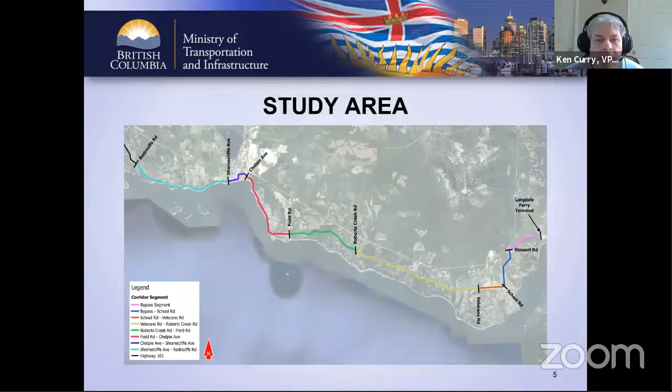You'll see the different colors here. We broke it into some different areas, some for the more urban areas, some for the more rural areas, and some based on the geometry of the road, such as the initial segment from the ferry terminal to Stewart Road, for example, being a 4-lane highway in that area, and the other sections being 2 lanes. So each section was analyzed a little bit differently.

When we looked at some of the analysis we were looking to do on the corridor from a highway operations standpoint, we were definitely looking at the capacity analysis of the corridor.

There's definitely no concern that the existing corridor was exceeding capacity at any time, both existing and in the future. So we looked at the rural segment primarily, that's what's being driven out there from a highway operations standpoint. The segment between Veterans Road and Field Road, we broke into 2 pieces. Then we looked at intersection operations, since those govern the capacity of the highway at those nodes. We looked at 11 intersections along the corridor to assess the capacity analysis at those locations.

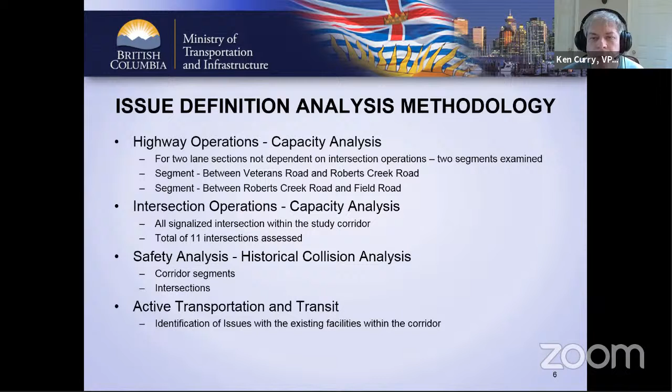We also did a safety analysis of the entire corridor, looking at the corridor segments and each individual intersection where we have data collected over the last 5 to 7 years. And then we did a high-level review of active transportation and transit in the corridor, and looked at how we could address those as part of other improvements for the corridor.

From a highway operations standpoint, in that rural section between Veterans Road and Field Road, we looked at the segments both in the existing and the future. This is the existing situation out there today, as we analyzed in 2018, looking at summer and fall. Here we're looking at a level of service, which is more about passing opportunities and time spent following - a kind of industry standard measure for analyzing 2-lane highways.

The information presented on screen shows a level of service, ranked A to F. E and F are typically considered unsatisfactory, while A to D is deemed satisfactory. A tells us there's a really good level of service, F tells us there's a really poor level of service, meaning time spent following is really high at level of service F.

So we see here in this table that today, looking at both summer and fall, the highway is right at that cusp - it's at level of service D. So it's just about at the point where we look at trying to make some improvements.

But when we look at the future, out to 2035 - a period we developed based on some of the OCPs of both Gibsons and Sechelt, and some work done for the regional district - we came up with 2035 as a good point to forecast our traffic volumes. Looking at 2035 in both summer and fall, we can see that during summer volumes we're definitely getting into some issues, with level of services D, E's, and F's. So the facility by 2035, or before, would start to have an undesirable level of service in terms of percent time following.

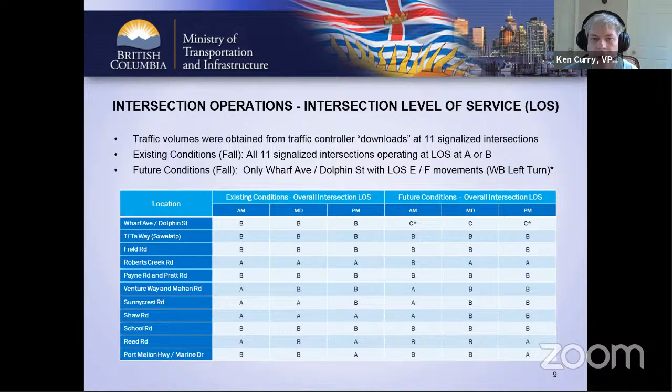Through all this analysis, looking at the fall operating conditions, there was only one intersection showing poor movements: the Wharf Avenue and Dolphin Street intersection, where the westbound left turn had definitely poor, almost failing, levels of service with lots of delay for that movement. So that one definitely needed to be addressed as part of our options and mitigation measures.

From traffic safety collision analysis, we looked at data from 2008 to 2017, about 10 years of data. There was a total of just over 600, almost 700 records in that area.

From that, we looked at the severity—how many fatal incidents there were, personal injury, and property damage only. We saw about half of the incidents were personal injury or fatalities.

That tells us that in a corridor like this, we're probably seeing incidents where vehicles stop to turn left off the highway, stopping in the through lane because there are no turn lanes, and getting rear-ended by other cars not expecting a stopped vehicle. That guided some of our mitigation measure development.

This map provides a summary of all the performance and safety deficiencies along the corridor. We had quite a few issues, and I didn't touch much on the Davis Bay segment, but there are definitely a lot of safety issues there at some of the intersections, so that segment got some special treatment in our development of mitigation measures.

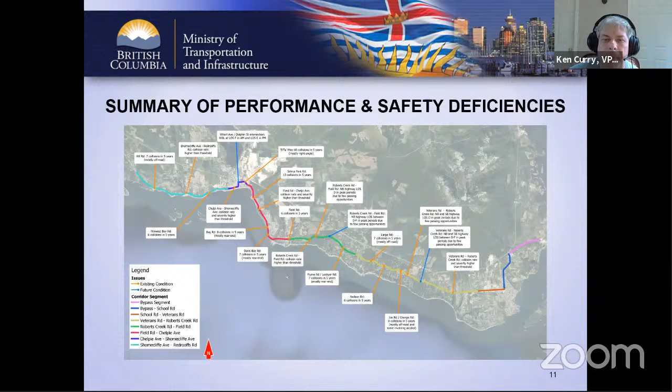Now for the improvement options, at a high level we looked at highway performance—the two-lane rural section—intersection performance, and safety. We identified where the issues were and the time frame, whether existing or future deficiencies, and what kind of potential improvement options could address them.

We looked at new passing lanes for the rural highway segment to address the level of service issue—not a capacity issue, as I mentioned before, but more about level of service and percent time following.

For intersection performance, we looked at increasing capacity at some intersections, primarily the Wharf Avenue and Dolphin Street intersection. Then for safety improvements—where we focused a lot of our efforts—we looked at left turns off the highway, acceleration and deceleration lanes onto and off the highway, and modified geometry at some intersections to improve the angle that the approaching road connects to the highway.

We also looked at some places for turn restrictions, and in a couple of locations, some new traffic signals.

With respect to the highway's rural section, passing lanes between Gibsons and Sechelt, we developed three passing lane improvements, located between the Field Road and Veterans Road area.

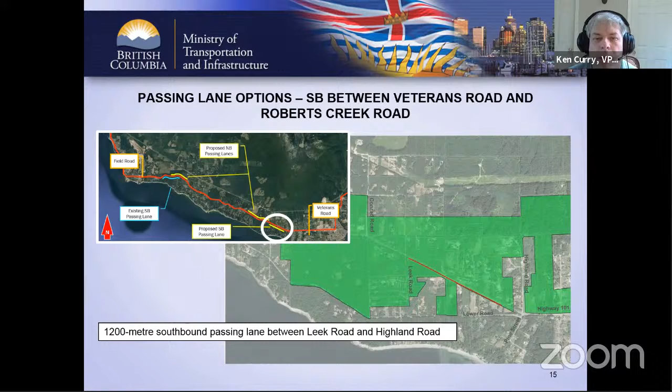So we just think of a couple of things like the passing lanes. Here we look at the southbound direction between Veterans Road and Roberts Creek Road. We looked at about a 1,200 meter segment between Leek Road and Highland Road to address the poor level of service in the southbound direction on Roberts Creek Road. And similarly in the northbound direction, we looked at about a 1,600 meter long northbound passing lane between Leek Road and Maskell Road.

These distances and locations were chosen trying to optimize the locations in terms of reducing or minimizing the number of conflicts with some municipal roads or even with driveways. So we're trying to reduce those numbers as much as we can, and that's where we tried to optimize and maximize the length of the passing lanes.

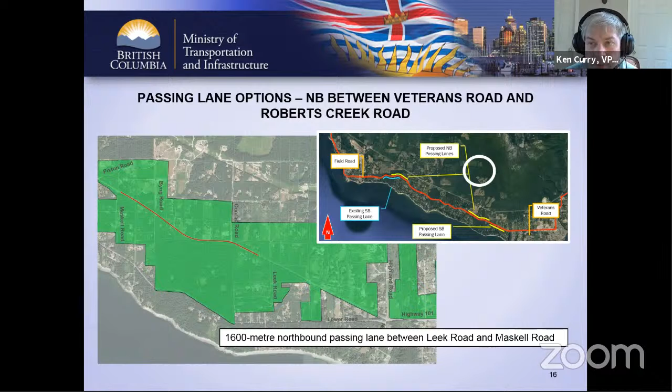So this one was a northbound passing lane opportunity between Veterans Road and Roberts Creek Road. And the last one was an 1,800 meter northbound passing lane between Pell Road and Jack Road. So these are the three passing lane options that we considered in our improvements.

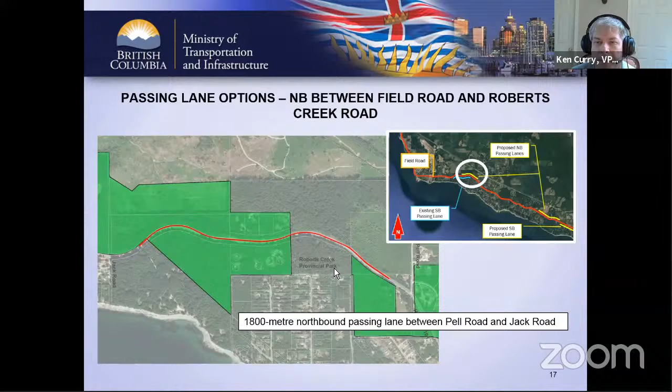When we think of intersection improvements, we looked at about 8 different intersections. At Joe Road and Orange Road, we looked at adding a northbound left turn lane and a southbound left turn lane, so kind of opposing left turn lanes. This is a location that today has no left turn bays, and this could be a reason for the rear end collisions popping up. So by separating out the through movements from the left turn lanes, we hope to improve safety and the overall intersection geometry.

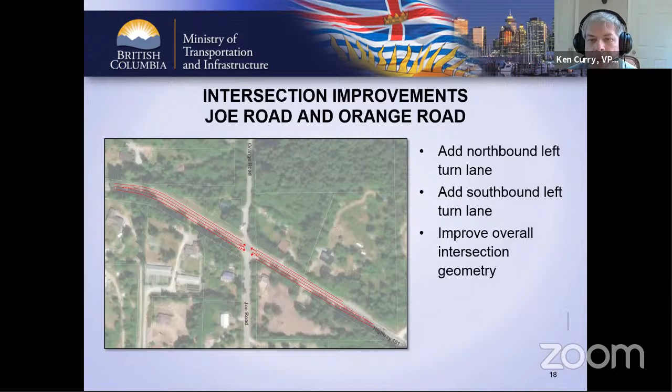At the Flume Road area, we looked at a couple of improvements at Flume Road and Marlene Road. Here we would again be adding left turn bays at these locations to separate the left turn movements from the through movements. And we'd probably have a painted median between the two intersections given their close proximity.

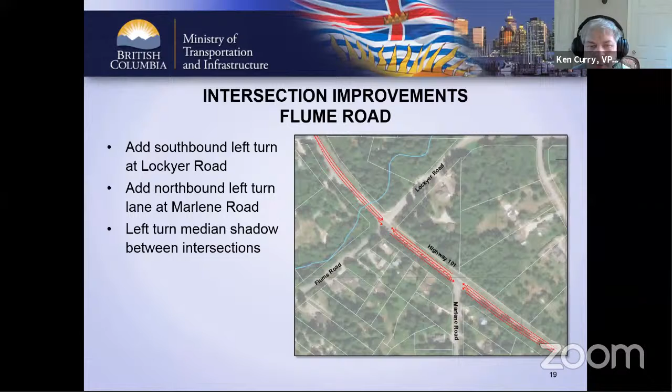At Lower Road and Highland Road, again we'd be looking at adding left turn lanes. We'd also be looking at having a deceleration lane in the southbound direction, which might help given the tight geometry on Lower Road. So those would be the improvements we put forward at that location.

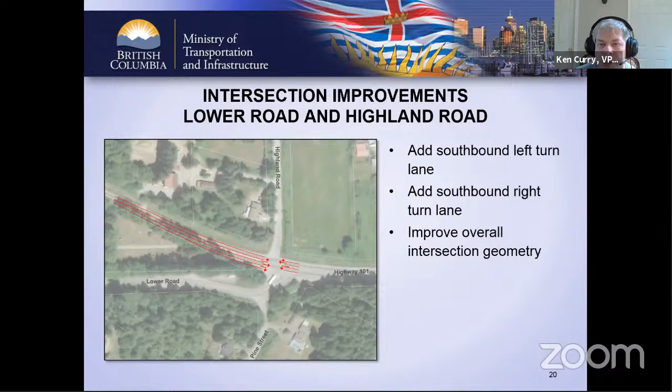At Ti'ta Way, this was a safety issue that was raised, so we recommended to the ministry to look at maybe a southbound left turn protected-only phase. When we looked at the collision types at this intersection, we saw a few collisions related to people making unsafe left turn movements. So we felt that if we put that in a protected-only phase, it could improve that operation.

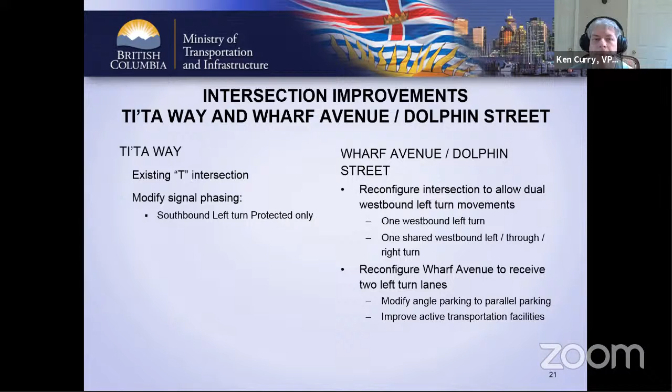At Wharf Avenue, we had capacity issues that we raised, so we felt we would reconfigure this intersection to allow dual left turn movements in the westbound direction. That would mean some minor modifications of Wharf Avenue to receive those two left turn lanes, potentially modifying the angle parking to convert it to parallel parking, which would give an opportunity to improve the active transportation facilities adjacent to the parallel parking.

At Shorncliffe, we recommended tightening up the intersection, improving the geometry. We would look at modifying the islands and the channelization, which would reduce the crosswalk distances at the location, reducing the exposure for pedestrians crossing the road. This is a location that could potentially have a traffic signal, or at least a pedestrian crossing signal, to improve pedestrian safety crossing the highway.

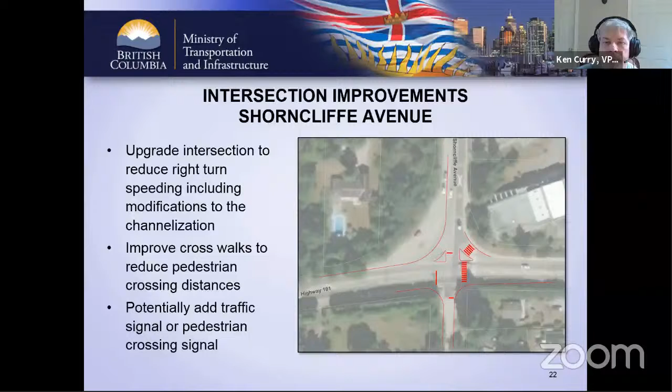Then a couple other smaller improvements, just some realignments. This is at Hill Road. The existing intersection connects with Highway 101 at a very skewed angle with poor sight distances. So we put forward a recommendation to look at an alternate access for the residents on Dale Road, where we have a connection go out on the backside and connect up to the highway with a more perpendicular intersection with a left turn bay at that location.

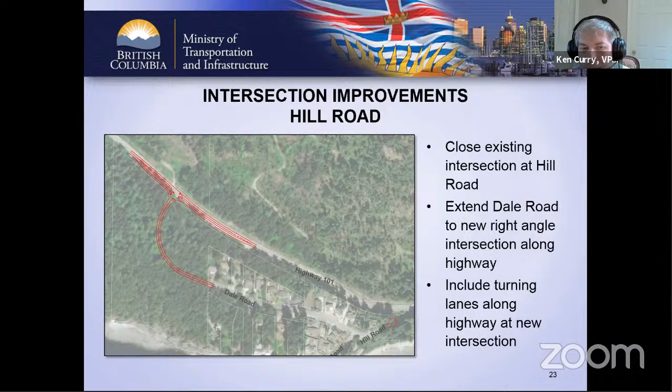Similarly at Red Roofs Road, the skew angle makes it difficult to have clear lines of sight when turning off of Redrooffs onto the highway. So we would suggest a slight realignment to make the intersection a little more perpendicular where it intersects with the highway.

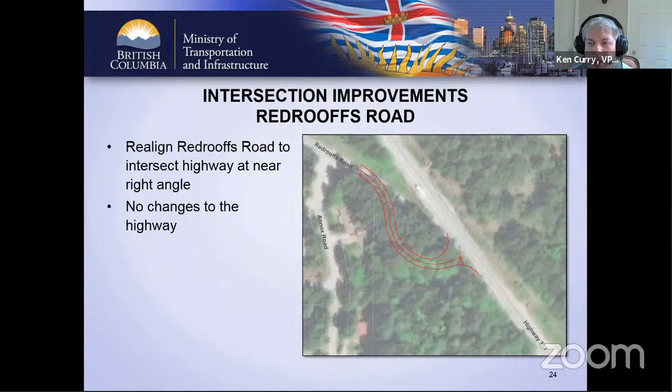As I mentioned at Davis Bay, there were a number of safety improvements we felt were necessary at this location, with a lot of collisions in this area. So we felt it was necessary to improve the overall cross-section through this area from the very south up to Monkey Tree Lane.

At Davis Bay Road, we're suggesting a possible new traffic signal be put into that location. Left turn lanes are proposed at intersections such as Mission Road, Heather Road, and Selma Park Road. We'd also look at restricting turning movements at Whitaker Road, Wesley Road, and Habby's Road to right in, right out only, and we'd recommend closing the north intersection at Monkey Tree Lane.

So we're trying to reduce conflicts as much as we can along this segment, but where warranted, we'd also improve access off the highway with left turn bays, so we're not affecting the through movement while improving safety at those intersections.

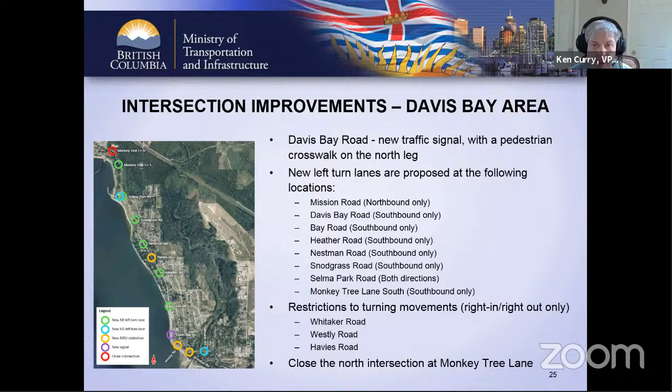The cross-section we were proposing for the Davis Bay area would have 2 through lanes, a center left turn lane for both northbound and southbound movements where applicable, a 2-meter shoulder to ministry standard for cycling, and a sidewalk on the east side.

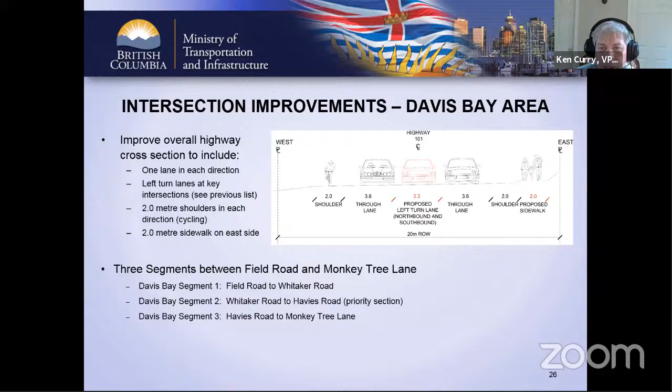So this gives us an overall map of where all the intersection improvements are proposed, along with the passing lanes. This also shows the long-term bypass options that we explored.

We looked at 3 bypass options. Option 1 was a shorter bypass using Reed Road. Option 2, the red one, was a bypass cutting through the backs of the properties between Cemetery Road and Reed Road, so we wouldn't have any access issues. Option 3 was a continuation of Highway 101 adjacent to the hydro right-of-way, connecting back to Payne Road.

We had different options for connecting back up to Gibsons Way or Highway 101 from Payne Road, potentially going to the other side of some developments to stay away from the accesses onto Payne Road.

Our recommendation was to consider further bypass option 3, mainly because Reed Road has a lot of access onto it, so that bypass would almost be conflicted from day one if development continued in that area, and we'd end up with a lot of accesses onto the bypass that we're trying to avoid on the existing corridor.

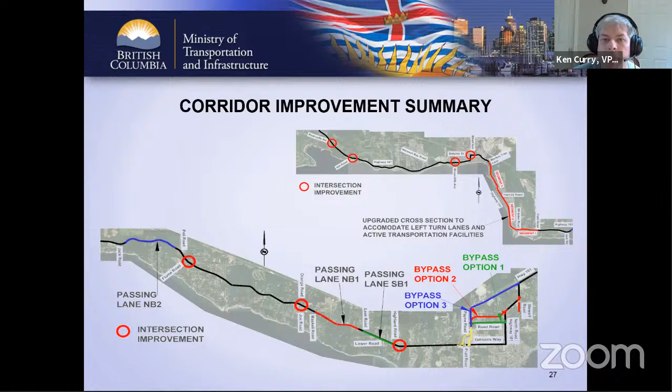So I'll quickly go through the evaluation results. For the passing lanes, we found that all three passing lanes we examined - one in the southbound direction, two in the northbound direction - reached an acceptable level of service well into 2035, so we did see definitely some big benefits with those.

We're recommending that the ministry consider those in the future. With the intersections we looked at, in terms of collision reduction we saw moderate to minor improvements. On average, at places like Joe Road and Orange Road, almost a collision per year on average could potentially be reduced with those intersection improvements.

Up to just a little over one collision per year at Flume Road, for example, with some minor improvements at Lower Road, Highland Road, and similarly at the Ti'Ta Way intersection. With the double left turns we're proposing in the future at Wharf Avenue and Dolphin Street, we'd see the level of service improved to acceptable levels by 2035.

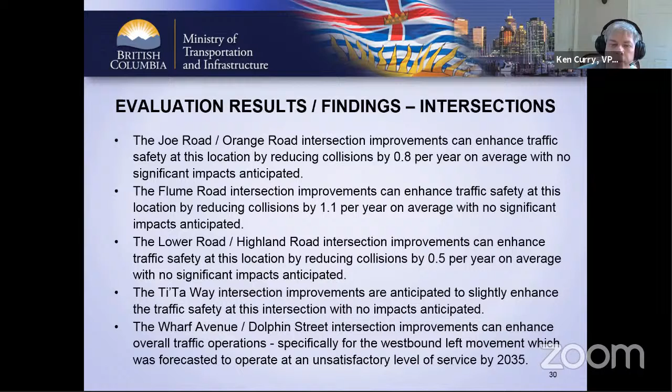At Shorncliffe, the collision data shows we'd see minor improvements in average collisions reduced per year, similar at Hill Road and Redrooffs Road - those are fairly minor volume intersections. But when we look at the whole Davis Bay and Selma Park area together, all those improvements combined could reduce upwards of almost 7 collisions per year in that area.

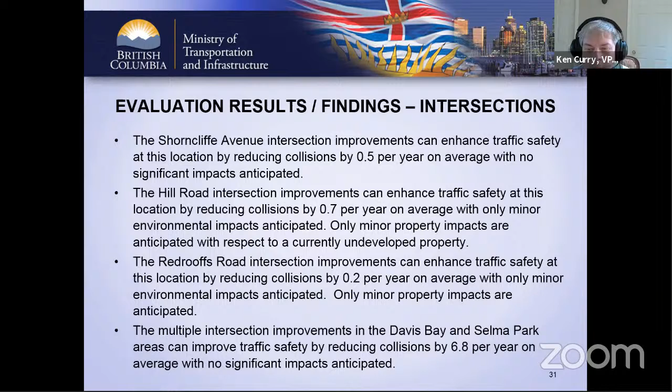Active transportation: when we went through and did our reviews along the corridor and met with Sechelt, Gibsons, the regional district, and the First Nations themselves, we found that there were a lot of gaps in the active transportation facilities out there today, both in sidewalks and cycle lanes, especially in the urban areas. Narrow shoulders along the highway in the rural areas, definitely not to current standards, and there's some informal facilities or limited space at several of the transit stops along the corridor, with very tight spacing for some of those stops.

So when we think about some of the things that came out of our study, targeted improvements - we're showing improvements that focus on Shorncliffe Avenue to improve pedestrian and active transportation crossing the highway, including improved geometry, traffic islands, channelization, and potential pedestrian signals. In the Davis Bay area, we looked at significant improvements that would come with an improved cross-section, including shoulder cycle lanes on both sides and a sidewalk on the east side.

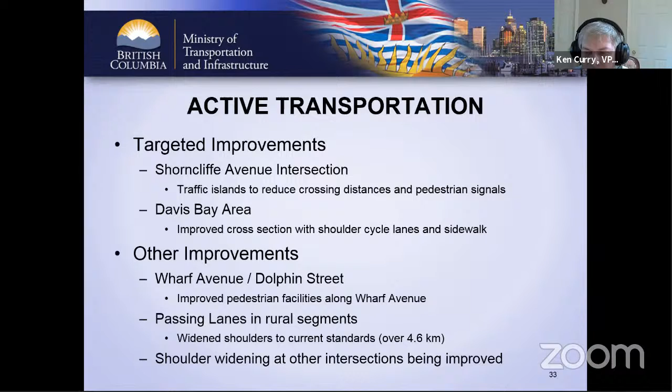When we look at other locations, such as Wharf Avenue and Dolphin Street, those improvements would facilitate improving the pedestrian facilities, along Wharf Avenue, as part of that intersection improvement. The passing lanes in rural segments would present an opportunity to widen the shoulders to current standards - there's over 4.6 kilometers of passing lanes proposed here, giving a lot of improvements to the shoulders in those locations. And everywhere else there's an intersection improvement, the roadway would be reconstructed to current standards, with shoulder widening as part of those projects when approved for implementation.

So finally, just to put a little summary on some timelines. What we've recommended back to the ministry is that the following intersection safety improvements be moved forward: Joe Road, Orange Road, kind of top of the list, and Shorncliffe Avenue, followed by Lower Road and Highland Road, and then Ti'Ta Way.

One of the things to address some of the traffic issues that we saw, and what we heard back from the town of Gibsons as well, is that quite a few of the intersections experience within the peak hour some isolated delays, really to do with ferry traffic surges. So they see maybe within 20 minutes to half an hour, within the hour, significant delays at some of the intersections. But when we look at the intersection over the overall hour, they're operating not too bad.

So what we've suggested the ministry consider is what we call adaptive signal control. That's where the signals have detectors before and afterwards, and they can see the demand increasing, and they automatically adjust the signal timing so that the green split towards the highway would increase temporarily to adjust for the demand, then go back to the normal signal timing plan based on normal conditions outside those ferry traffic surges.

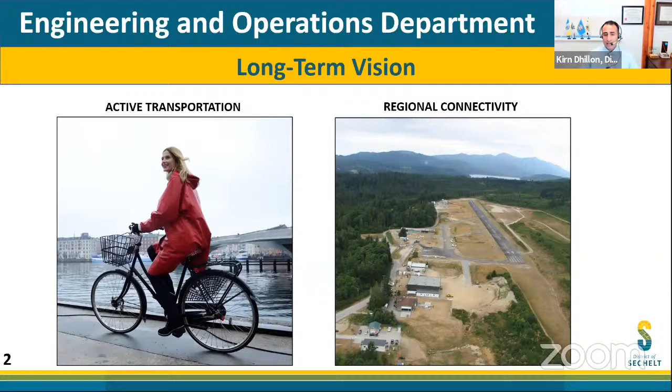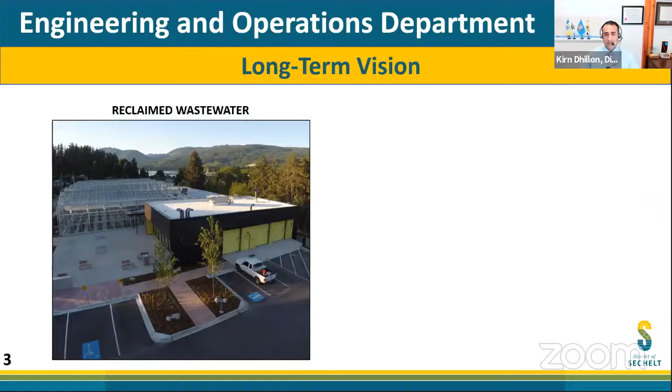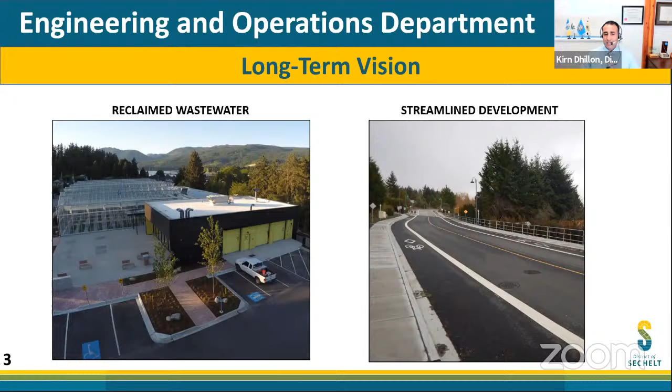I wanted to talk about—let's fast forward in a time machine to the year 2025—and hopefully the things we would like to see in Sechelt by then. Rather than having a low active transportation score, Sechelt is one of the best active transportation communities in the province. We've leveraged grant funding and created a very comprehensive network of active transportation that our citizens enjoy. We have better regional connectivity because we've expanded the runway at the airport, and now we can entertain some flights that we couldn't before. Our reclaimed wastewater facility is functioning at peak optimal capacity, and there are opportunities for residents to use the reclaimed wastewater we produce. Development, in terms of engineering approval, is more streamlined now, with more clear processes in place, and Sechelt is attracting very good developers building sustainable developments in our community. We're adopting more green infrastructure principles and seeing how we can incorporate those into our infrastructure projects.

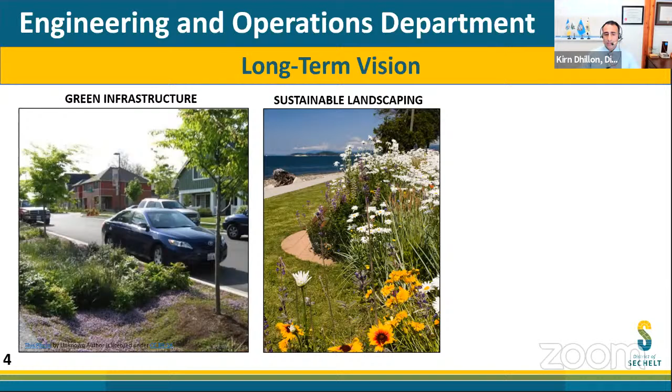We are looking at using more sustainable landscaping that is native to the area, is easy to maintain, and doesn't require a lot of water. And we have a great and improved parks and trails network. So this is just some of the things that could happen in this long-term vision.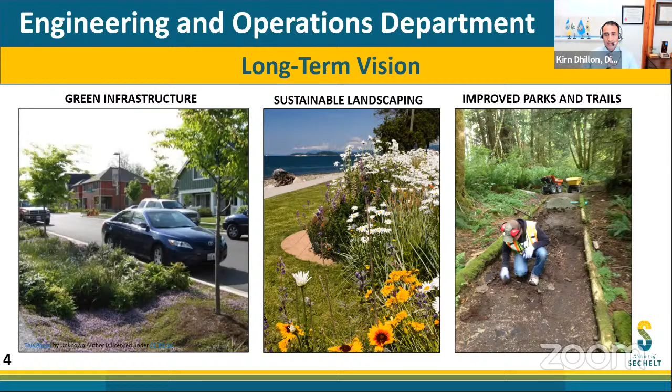In terms of our infrastructure renewal and investment strategy, we had an old sustainability gap that was quite large, and through cost containment and increasing revenue, we have closed that sustainability gap with our infrastructure, bringing it down to half.

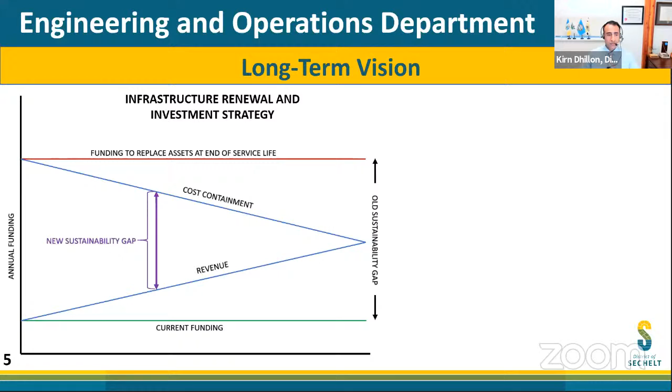Some of our cost containment strategies include relining our buried infrastructure with cured-in-place pipe lining, doing a crack sealing program to extend the longevity of our pavement assets, and looking at building retrofits to see how we can reduce energy consumption with our current stock of buildings.

Some of the revenue strategies we are exploring include a review of our DCCs and how they're structured, improved grant writing skills—we're already pretty good, but we can always improve—and looking at densification and infills to create a more sustainable footprint for our community, where our partners in the planning division will be very important.

Streamlining development, having the right type of density of development to fund our infrastructure, restructuring sanitary sewer user rates, and also looking at stormwater utility user fees, which some municipalities are moving towards, as a way to generate revenues.

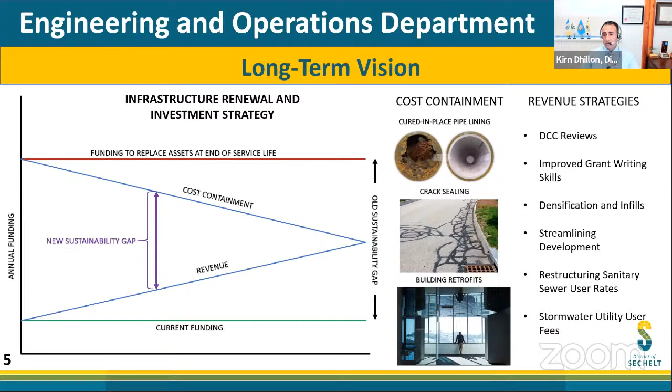So the next few slides are on the 2021 strategic action plan for the division. This is going to touch on the totality of what we do and the various services we want to provide to residents of Sechelt—things that probably should have been done in the past that we're progressing now, and things that we will be doing.

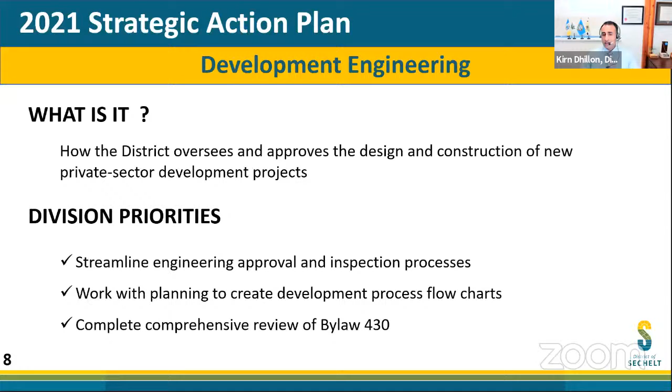In development engineering, just a quick primer: it's how the district oversees and approves the design and construction of new private sector development projects. The division priorities are to streamline engineering approval and inspection processes, work with planning to create development process flowcharts to give more clarity to the development community, and have a complete and comprehensive review of Bylaw 430 that controls subdivisions and developments.

Wastewater is going to be the longest list of priorities. We have a new engineer in place to help champion a lot of these initiatives, and we hope to hire more resources—right now we're out for a Class 4 operator to help with the Water Resource Center, which was missing. Wastewater is how the district collects and treats wastewater to return to the environment as clean water.

Our priorities are to provide a recommendation to council about the liquid waste management plan and whether we should go forward with that, or pursue something under the municipal wastewater regulation.

Apply for funding opportunities to fund studies for the Water Resource Center in terms of optimization and asset management, and issue a request for proposals for the Water Resource Center process audit, benchmarking, and optimization report—hopefully by the end of the year.

We want to prepare a request for proposal for a Water Resources Facility Master Plan and Asset Management Plan for posting in the subsequent year, complete final site selection and detailed design for a municipal RV sani station with hopefully provincial funding approval, and build a chemical storage facility for the Water Resource Center.

We have a plan for the expansion of the sanitary collection to unserviced areas and want to keep developing those plans—we have some functional plans in place—and issue a tender for camera inspection and condition assessment of all district sanitary and storm sewer assets.

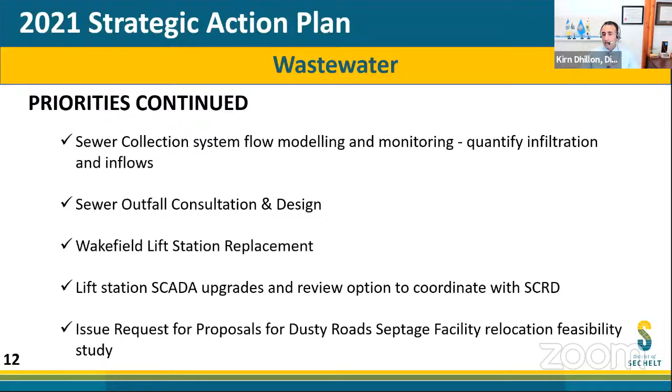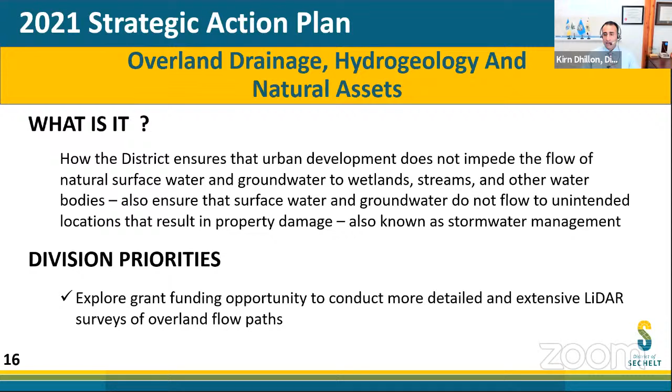We'd like to explore grant funding opportunities to conduct more detailed and extensive LiDAR surveys to define, at a granular level, where the overland flow paths are.

This is how the district reuses treated wastewater, promotes reduced potable water usage, and increases the use of stormwater for non-potable purposes.

Two of our priorities are to conduct a reclaimed water feasibility study, which we have funding for, and we've selected a consultant for that. Kerr Wood Leidal will be leading the initial work on that.

We want to prepare a council report at some point in the year to present options on grey water usage and best practices and recommendations, which will definitely need coordination with planning and our new chief building officer.

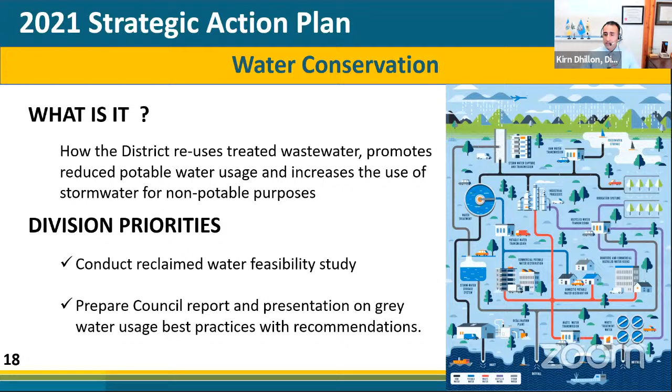So what is it? It's how the district promotes active modes of transportation such as cycling and walking within the district, and builds infrastructure to facilitate its use. You're seeing some of that right now on Trail Avenue.

The division priorities are to complete the Sun Coaster Trail Phase 2, and to issue an RFP for design and public consultation for the East Porpoise Bay Esplanade project, which is a big one requiring a lot of planning. We'd like to start moving in that direction with some engagement to define the parameters of what we're doing and how we're going to do it.

We need to do some of the more mundane things that haven't happened in recent years, like sidewalk inspections. Director Allen did make reference to this in his presentation, but another big thing we want to work on is the transportation master plan, which we are doing in concert with planning, and Megan is heading that up.

Also in active transportation: a pedestrian controlled crosswalk at Derby and Norwest Bay Road. We have a Bike BC grant in place to do bike lanes on Reef Road, Shoalway, and Lighthouse Avenue.

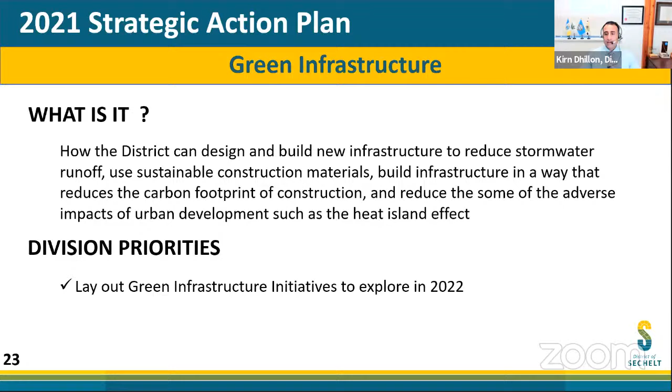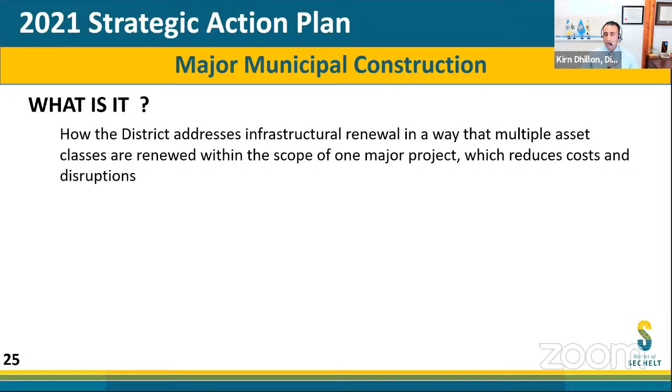Major municipal construction - what is it? It's how the district addresses infrastructure renewal in a way that multiple asset classes are renewed within the scope of one major project. This reduces costs and disruptions to road users to have your roads done at the same time that you do your sanitary and stormwater infrastructure, grouping projects together in that way.

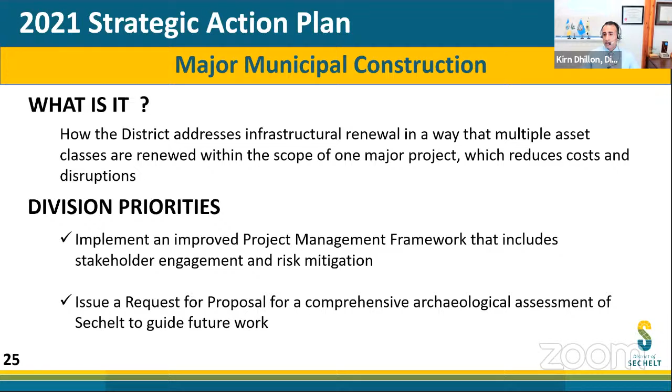Division priorities for that area would be to implement an improved project management framework that includes stakeholder engagement and risk mitigation, in line with previous reports we've received. As vaccines roll out, we hope to do more face-to-face engagement with citizens and more fun community events around construction. We'd also like to issue a request for proposal for a comprehensive archaeological assessment of Sechelt to guide future work, so there's not the level of uncertainty we have right now going into these projects.

We'd hope to take that information and convert it into a standard operating procedure. We do want to finish the Trail Avenue construction - if we get awarded phase 2, that would continue into next year, but the stuff we have opened up now, we want completed.

I'm very optimistic for July - June would be even better. We need to design a Marine Way retaining wall solution, which was something that was identified. And pending approval of the AAP, a major project for municipal construction would be the operations building.

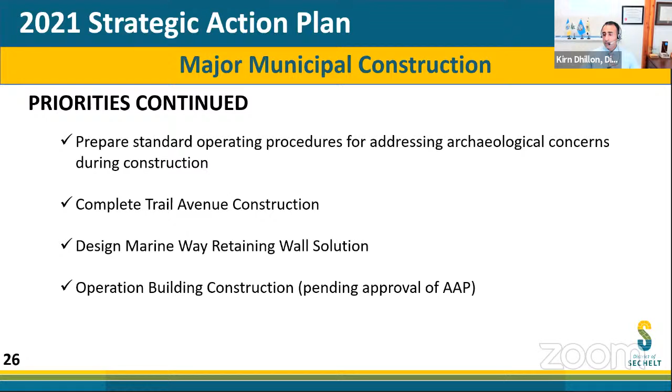Downtown infrastructure revitalization - something that's near and dear to many in the community. It's how the district renews and revitalizes base infrastructure in the core commercial area to create the conditions for a vibrant and commercially successful downtown.

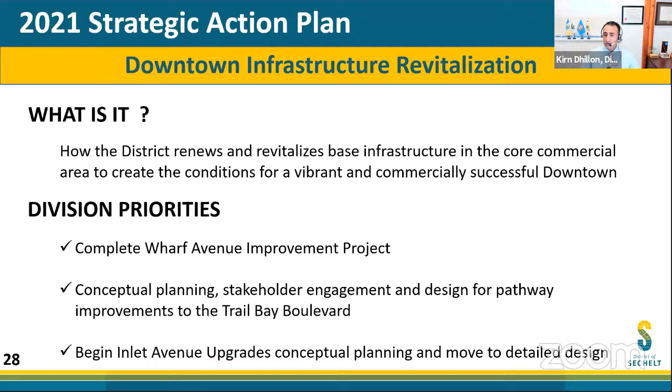We have several initiatives we want to advance in 2021: complete the Wharf Avenue Improvement Project, begin conceptual planning, engagement and design for the Trail Bay Boulevard improvements, and start moving along the road to planning our next major downtown project, the Inlet Avenue upgrades. So those are some important downtown revitalization projects.

Pavement management is the way we maintain and rehabilitate our pavement assets to keep them at desired service levels. In 2021, we want to issue a request for proposal for a condition assessment of roads so we know what condition they're in and what we need to do to maintain service levels. There will also be a 2021 pavement overlay program.

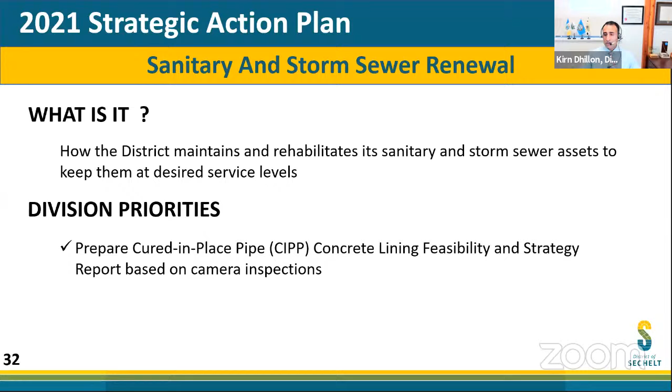Sanitary and storm sewer renewal is the way we rehabilitate and maintain our sanitary and storm sewer assets. One thing I want to look at for 2021 is starting on cured-in-place pipe lining to extend the life of these assets. I've had discussions with SCRD and the Town of Gibsons to see if we can jointly create an economy of scale for this type of work.

The airport - how we maintain and improve the airport and how it services the community. We've successfully completed the award of the construction project to Jake's Construction. We want to complete the airport runway expansion project this year, and also consider whether we need a master plan.

Bridges, culverts, and wharves - how we maintain and rehabilitate existing structures in and over water bodies and plan for construction of new structures that interact with water bodies. This year we want to do structural inspections of wharves, complete the Wakefield Road culvert replacement, and complete design and construction of the Cook Creek culvert replacement.

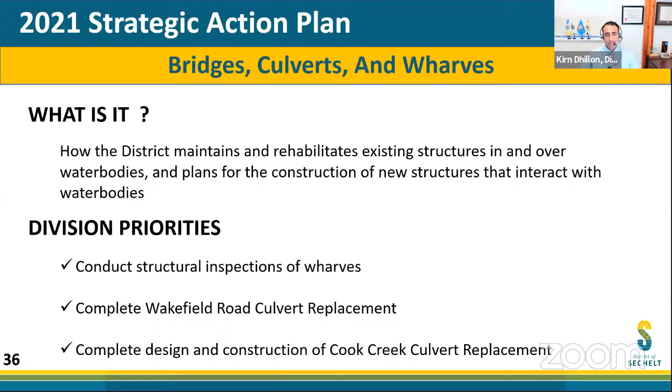Street lighting is balancing the need for safety with residents' desire for reduced light pollution. There are obviously requirements for safety, but our residents also desire dark skies, so balancing those two can be challenging. We have solutions though, and for this year we're looking at working with BC Hydro on continuing the LED streetlight replacement program.

That covers the stuff on the engineering side. There's a lot there, so I can pause for a break for questions now, or I can continue on and go through operations.

Yeah, we can check. Oh, Councillor Toth has a question. Thank you, Chair. I had originally written down the Wakefield Road Culvert project as one I know has been a long-running issue we have yet to take on, but you answered that in your presentation, so I'm good.

With the WRC, glad to see the chemical storage facility being recognized as a priority - it's been left on the side for too long, we definitely need it. I'm also wondering about planning for a possible expansion of that facility someday, particularly so we can have a project in place ready if a grant opportunity comes available. I'm just wondering if that's work that would proceed as part of a facilities master plan, or if it can be done on its own.

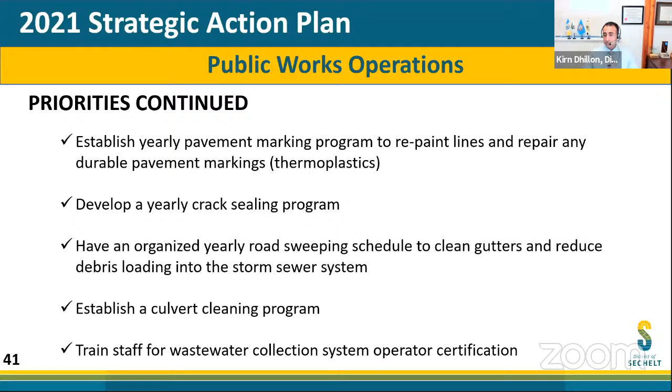We would like to implement a storm sewer flushing program to make sure there are no clogs or issues with our storm sewers. And then we do have an ongoing issue with the roof leaking at the RCMP.

Parks and trails operations is how the district maintains and operates our parks, trails, sports facilities, beach accesses, and many other things too numerous to list. Some of these get tracked under our active transportation portfolio, but here are some main priorities for parks: complete an asset inventory for all parks assets using our parks collector application.

Additional priorities for parks and trails would be to provide a recommendation to engineering for low maintenance landscaping standards to conserve water. We want to look at how we can improve our sports fields to maybe attract more sports tournaments once we get past this pandemic. And we're currently in the process of looking at some graffiti proofing options for our washrooms and other facilities, because that has become a problem recently.

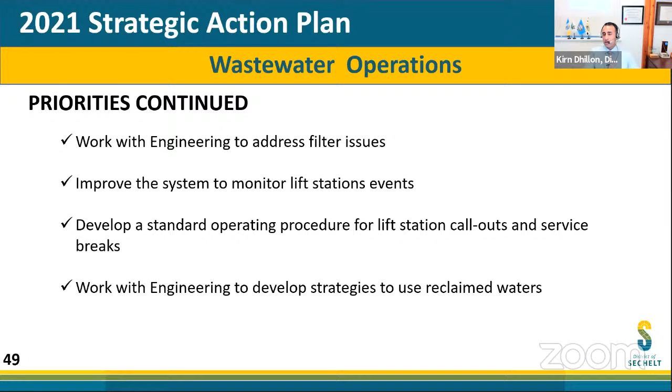My stuff is more at a high level, but some of the things I would like to do is just recruit an asset management technician. That's pretty high on my list.

I'm working on revising some job descriptions, presenting yearly departmental action plans, which is what today is all about. And I'm here to support the whole division.

I've started holding quarterly, they were initially supposed to be quarterly meetings with the engineering operations people at SCRD, the town of Gibsons, and SNGD, but due to popular requests, they want to have them once every 2 months. So those are going to be interesting discussions going forward.

Asset management is a huge thing we want to get going. Recently, we had a manager's meeting, where there was a call made out to have members of the staff join an asset management group, and there was a popular response. A lot of staff members were very excited to join that group.

I've also recruited some people external to the organization that work at other municipalities to talk about their journey and some of the lessons learned and the things that they would have done differently had they done it again. So looking forward to getting that working group up and running.